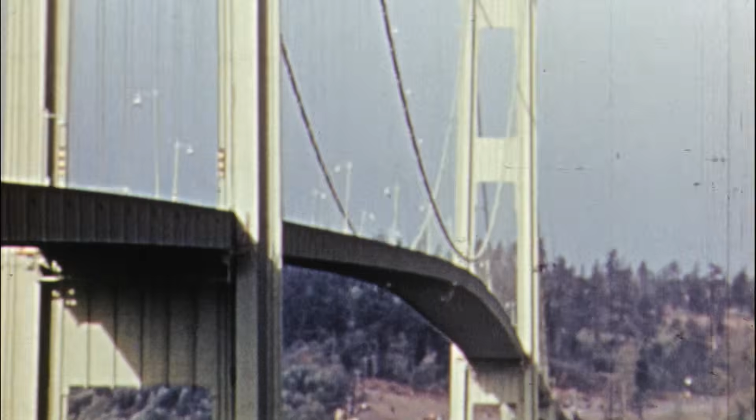In Washington state, a revolutionary bridge becomes an epic disaster. And in the Netherlands, a cutting-edge design comes crashing down. The top floor collapsed first, and then the second and the first. With big builds, even the smallest mistake can be a huge disaster. From miscalculations to misunderstandings. Some with deadly consequences. These catastrophes are every engineer's worst nightmare.

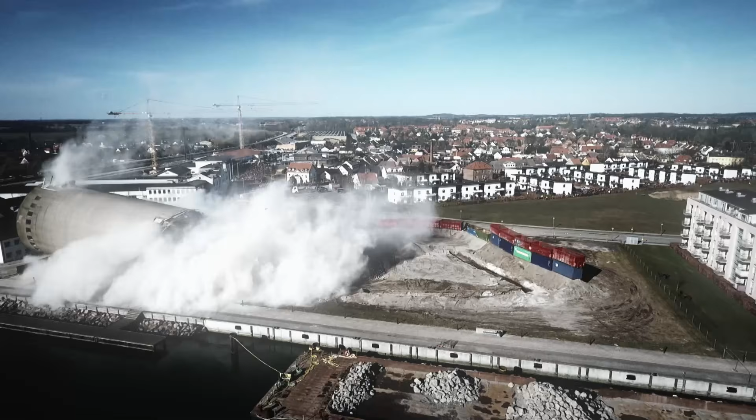Sometimes in big builds, there's a delicate balance between man-made and Mother Nature. Get it wrong, and the results can be catastrophic. Like this disaster that struck a suburban paradise in western Florida. These homes simply disappeared right in front of people's eyes. This is obviously a huge catastrophe, an engineering nightmare.

And left a community wondering, when will this happen again? Before you buy a house in Florida, this is something you definitely need to know about. It was the most devastating thing I think I've ever seen in my life.

Florida, the Sunshine State, boasts the longest coastline in America's lower 48 states. But it's also one of the lowest lying and home to over 30,000 lakes. Hundreds located in the Tampa suburb, aptly named Land O'Lakes. With year-round sunshine, endless lakes, and beautiful waterfront homes, Land O'Lakes is considered to be one of the top places to live in the whole of Florida.

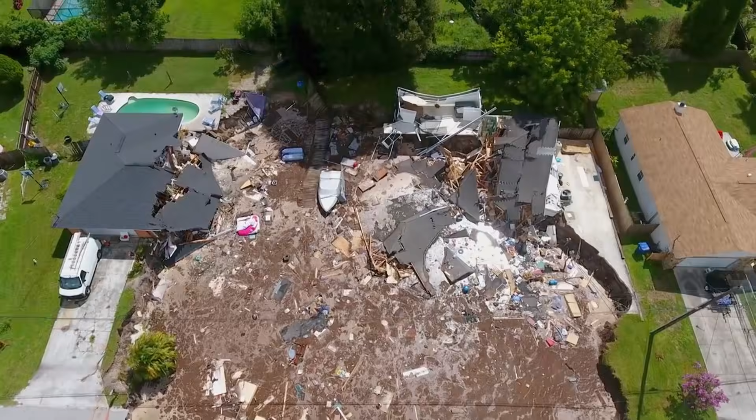This particular sinkhole uncovered a lot of issues for nearby homeowners that they had no idea about. Your quaint retirement life on a nice little lake in the middle of Florida suddenly getting swallowed up by the ground. With 2 homes entirely swallowed up, 6 more condemned, and the width approaching 80 meters, the obvious question was what had caused the massive sinkhole to open up.

One clear suspect was the area's geology. Statistically, Florida has more sinkholes than any other state in the U.S. In fact, the area around the Land O'Lakes is known as Sinkhole Alley. Florida is especially prone to sinkholes because it's largely built on limestone, which dissolves in water slowly, but it always dissolves. And that slow but inevitable process is the reason there are so many lakes here.

Geologist David Wilshaw explains. The limestone here is very porous, lots of caverns in that limestone, and these circular lakes that we see all around us here are reflections of the ground collapsing into the limestone and creating these depressions in the land surface, which then fill with water and create the beautiful lakes we have in Land O'Lakes.

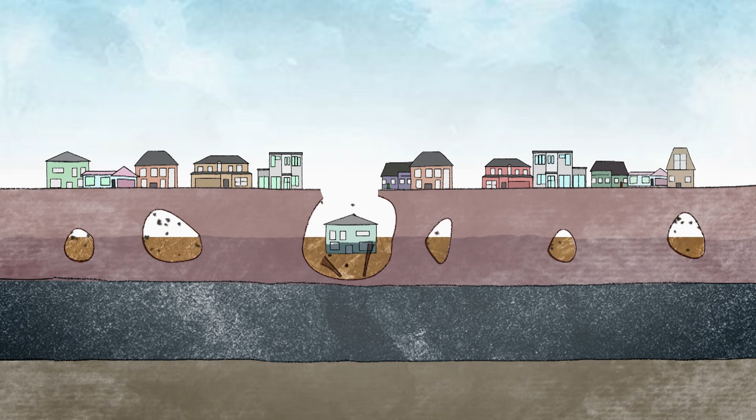While the sinkholes are actually responsible for the lakes that give the area its unique appeal, they also put its residents at serious risk. You could say a sinkhole is like an hourglass, with material being eroded from below. Eventually, as the material slips through the cracks, there's nothing solid holding the building up, and the ground gives way with a sudden and dramatic collapse.

Since 2003, there have been more than 300 reports of sinkhole activity in or around Land O'Lakes. It isn't the Land O'Lakes, it's the land of sinkholes. So, sinkholes are known and expected here.

And yet, despite all the evidence pointing to limestone eroding beneath the surface, geologists found that this sinkhole was the result of human activity. Sinkholes are no surprise to this area, but here it seems that Mother Nature's not wholly to blame. While sinkholes occur naturally in Florida, geologists believe many, like this one, are man-made.

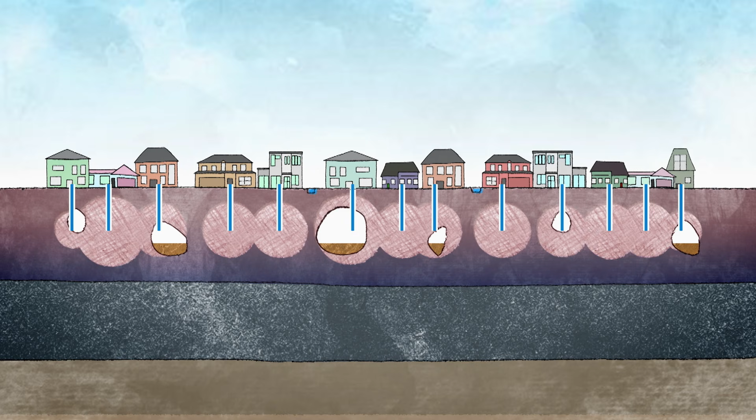By rapidly developing the area, groundwater is extracted and used for irrigation or residential taps, creating a cavity, destabilizing the ground below. Building work above ground can weaken the limestone even further, causing the soil above the cavity to collapse suddenly and without warning. This type of sinkhole is known as a cover collapse.

The developer decided to dredge the canals to interconnect all the lakes to create more potential waterfront home sites. When they dredged those canals, they filled in areas that probably should not have been filled in at that time. And over time, Mother Nature's just decided to take her property back and turn it back into the lake.

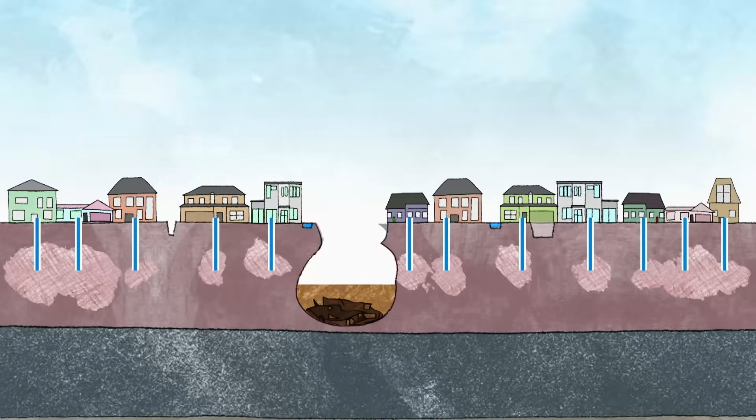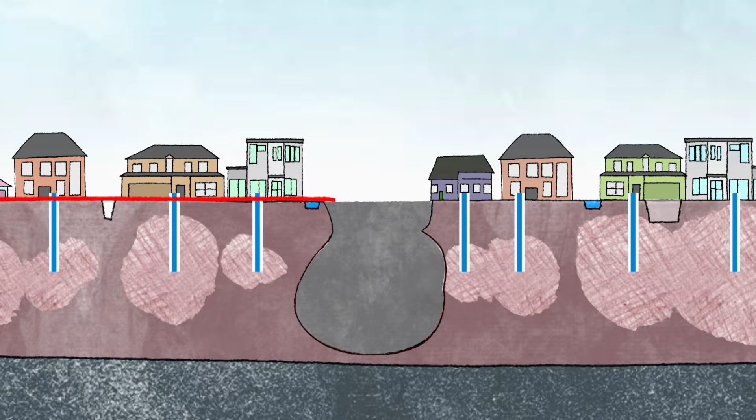The result? Decades later, the giant sinkhole opens up in Ocean Pines Drive. With homes and a road destroyed, engineers looked at ways to fix it. One solution used elsewhere is to simply fill the hole with a concrete plug. But here, with the land already unpredictable, completely filling it with heavy concrete wasn't viable. There's no way this land could be used for development again.

But to try to prevent it eroding further, engineers stabilized the bottom of the hole with tons of rock. For now, the sinkhole isn't going anywhere, but it's a frightening reminder for everyone of the danger lurking beneath their feet. Journalist Evan Donovan covered the story.

It is bad luck, it is nature, but it seems like we have the technology now to figure out where it's most likely that these things would pop up, and then what we can do to sort of mitigate the impact when they do happen. A lot of these homes were built in the 70s and 80s. Today, developers have new tools to check what's underneath, so in theory, this kind of collapse should be a thing of the past. Geologist David Wilshaw thinks they may have found the answer: ground-penetrating radar.

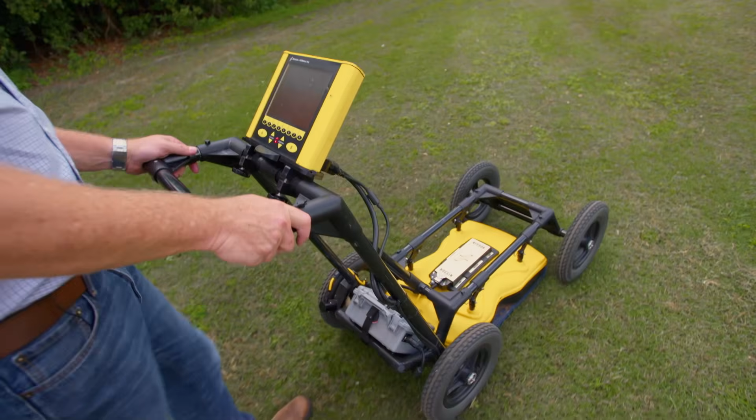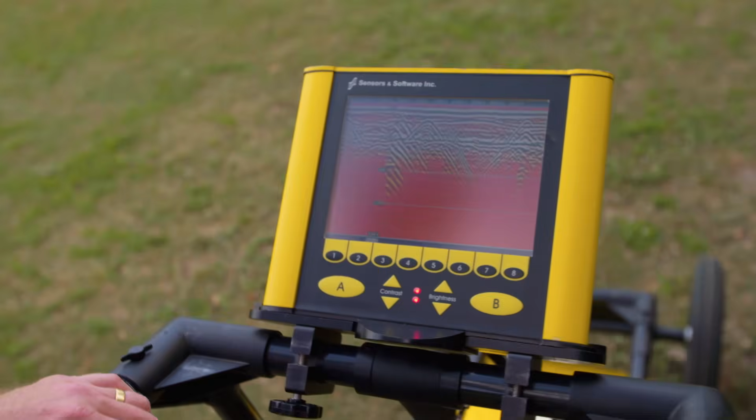And I know it looks like a glorified lawnmower, but it's a $30,000 very sophisticated-looking lawnmower. So, we use it all the time here in Florida to image the ground to try and find sinkholes. It puts electromagnetic energy into the ground, which passes through the different soil types at different speeds. And we can tell where those soil types have been disturbed. For example, if we have a sinkhole that might be forming, you'd expect to see those layers of soil dipping inwards towards a sinkhole.

While this technology can help prevent a future disaster, the demand for groundwater and land resources in Land O'Lakes continues to increase. And when you're building on shaky ground, there's always a risk. But despite the threat of other sinkholes opening up, there will always be a demand for homes with a lake view. Losing your home is heartbreaking, but thankfully this time, no one was hurt or killed.

A heartbreaking tragedy that shook an entire city. The sheer magnitude of this catastrophe turned thousands of tons of concrete and steel into rubble in just seconds. Many were left wondering why this one structure was so completely destroyed. I was looking at hand of God type of stuff here.

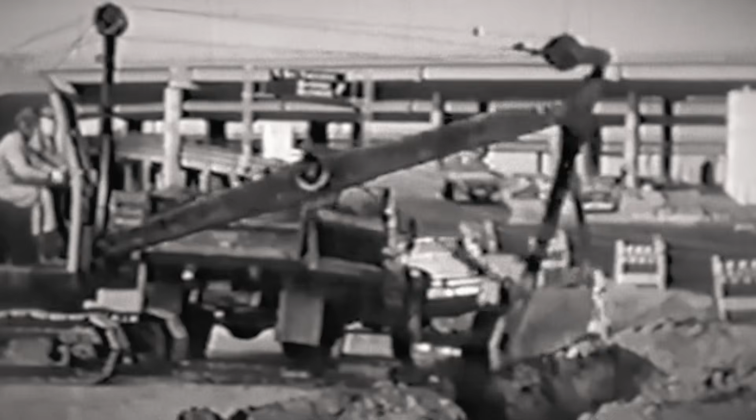200,000 refugees left the city. Many moved east across the bay to Oakland, doubling the city's population. Despite the danger lurking beneath, in the mid-20th century the population boomed. In the 1950s, to ease congestion, construction began on a new section of freeway running through downtown Oakland. To bypass local streets, planners turned to an age-old solution. Instead of going around, they would go over.

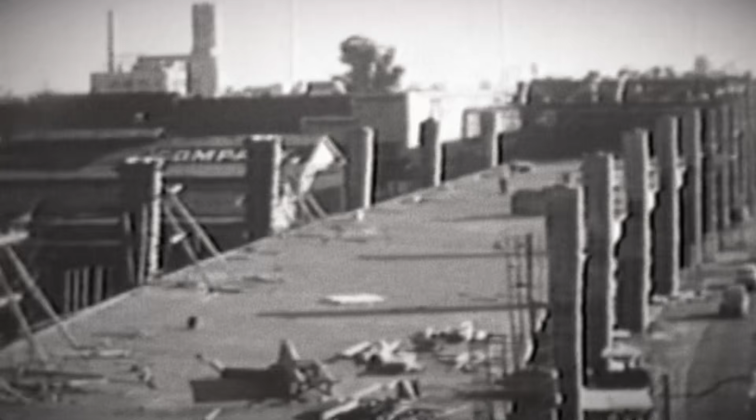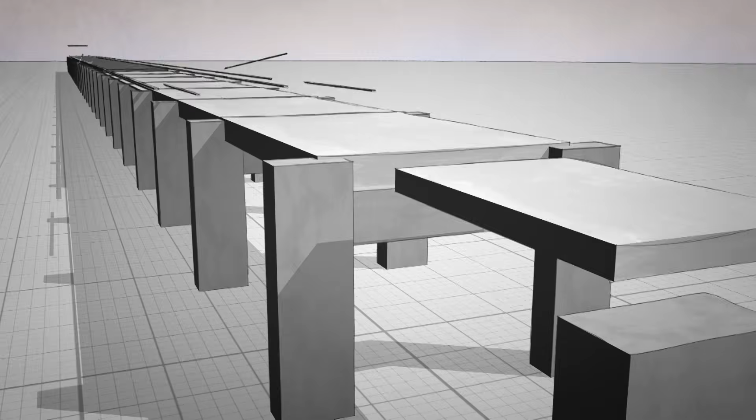Elevated roads have been around since Roman times and are known as viaducts. They're essentially a bridge or a sequence of bridges designed to carry a road over an obstacle, which could be a valley, a marsh, or a busy urban area. But this would be no ordinary viaduct. The plan was to build California's first ever double-decker freeway. Essentially one long line of bridges standing on top of another, running for more than 3 kilometers. The result? The Cypress Street Viaduct.

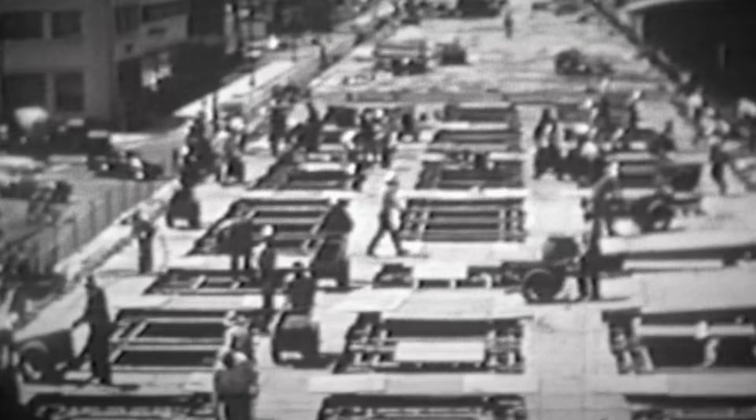In the 1950s, when the Cypress Street Viaduct was built, single-deck roadways were common, but building a double-deck viaduct was a first for California. Like all structures in the Bay Area, earthquake resistance was a key factor in this groundbreaking design. Structural engineer Jack Moehle explains. The Cypress Street Viaduct was one of the very earliest examples in the United States using pre-stressed concrete, a form of construction where the concrete is cast with the steel reinforcement pre-tensioned inside the structure.

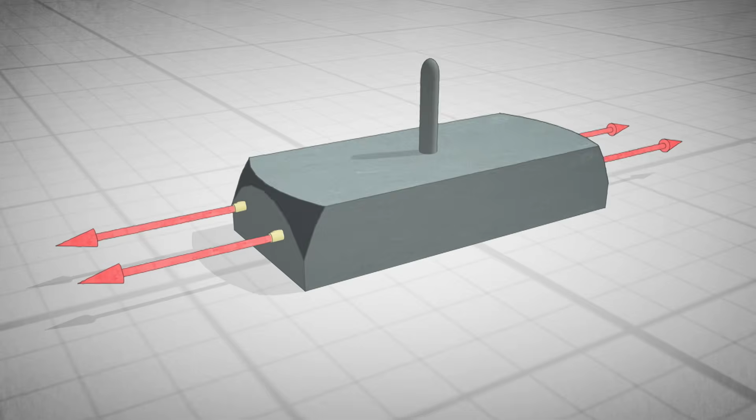A lot of structures use concrete poured over steel bars or rebar to give it strength. Engineers can make the concrete even stronger by stretching the bars tight before the concrete is poured. When it hardens, the steel is released, essentially compressing and strengthening the concrete. That's known as pre-stressed concrete. It's widely used today, but back then, it was untested. That was a very new, young technology. In fact, it was perhaps the first bridge in the United States that was built and designed with that technology.

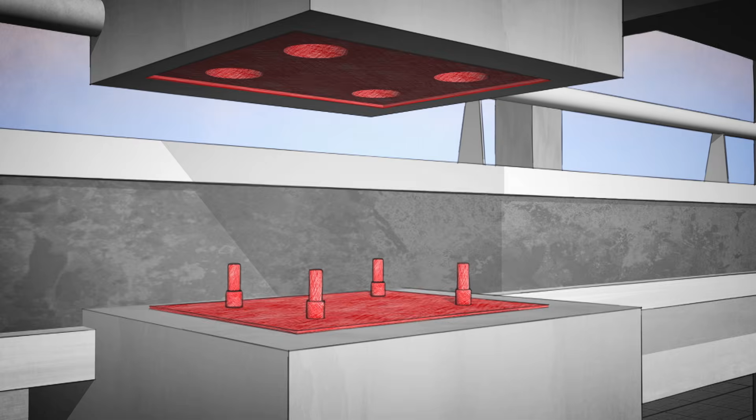They were concerned that if the structure moved, it would develop internal forces that would cause cracking and decrease its service life. And so what was done was to build a structure that was very loosely tied together so it could move. A fundamental element of this ability to move is steel rods embedded in the concrete where the columns meet, known as shear keys. Shear keys are designed to allow a building to shake during an earthquake without moving too far. At least that's the idea. In the viaduct, these were metal rods between the upper and lower columns designed to stop the top being shaken off. Here, to absorb earthquake forces, they would allow some movement, but not so much that the top columns could slide off the bottom.

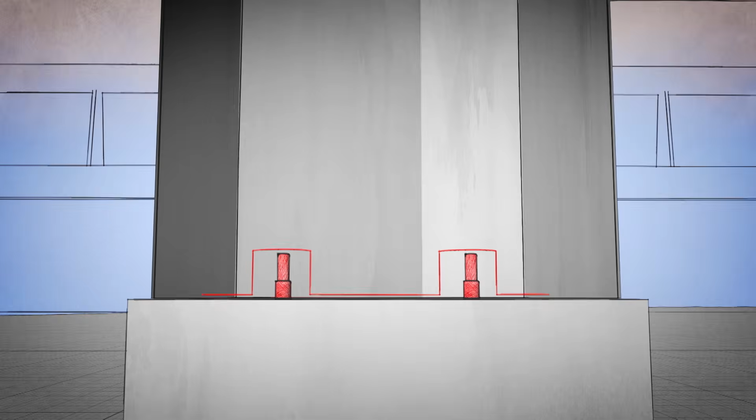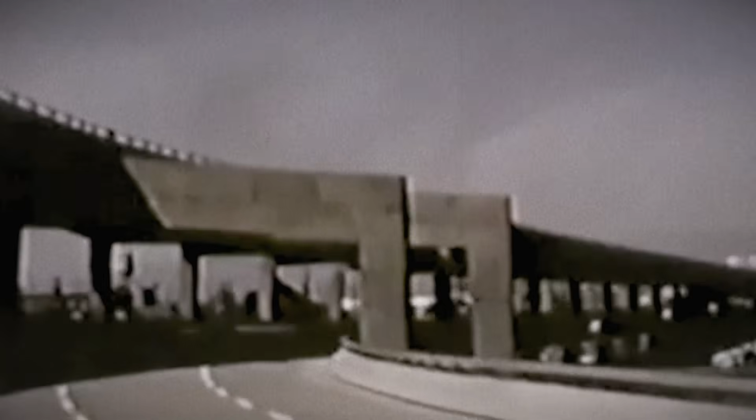The Cypress Street Viaduct opened in June 1957 at a cost of $9 million and was a huge success. It carried tens of thousands of vehicles a day for the next 3 decades. On Tuesday, October the 17th, 1989, Game 3 of the World Series between the Oakland A's and the San Francisco Giants saw more than 60,000 fans fill Candlestick Park. Anthony Moore, then a cub reporter, covered the game. So I went down to Candlestick Park in San Francisco to cover fans outside the stadium who didn't have tickets but still tailgated the game.

We had barely gotten equipment out. The camera was just on the shoulder of the photographer when, boom.

Oh my God, we're having an earthquake. Wait a minute. Hold on. 911. Yeah, this is an emergency in San Francisco. What happened? There's a hell of an earthquake, and we've got...

Just after 5 p.m., 60 million baseball fans saw their TV screens go black.

And we've got windows and everything.

The largest earthquake in 80 years ripped through the Bay Area, registering 7.1 on the Richter scale. The epicenter was over 60 miles or about 100 kilometers away, and the quake only lasted for 15 seconds, but it sent shockwaves that would leave a tragic mark on the city. A 1.2-kilometer stretch of the double-deck Cypress Street Viaduct had collapsed. I instantly knew this was the biggest disaster I'd ever seen. It was shocking. It was almost impossible to communicate visually or in words the scale of this devastation.

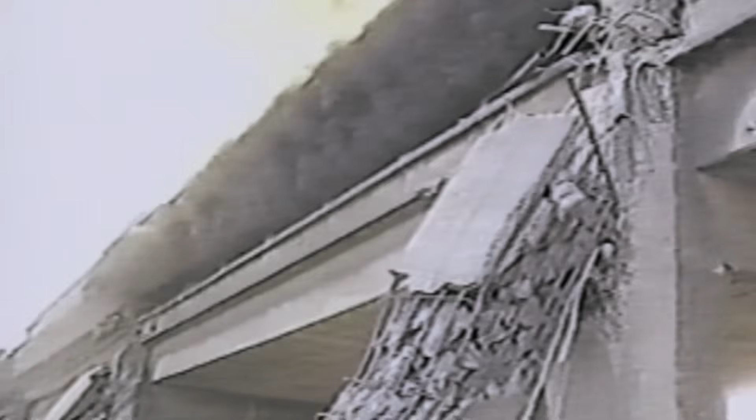Mark Hoffman, then a lieutenant with the Oakland Fire Department, was on duty nearby when he realized a major disaster was unfolding. We're only 2 blocks away from 14th and Broadway. That's basically the heart of downtown. When we pulled up here on 14th, I looked to the right. I saw a giant plume of smoke. Told the driver we're making a right. From here on out to about a mile and a half, the freeway was either partially or completely collapsed.

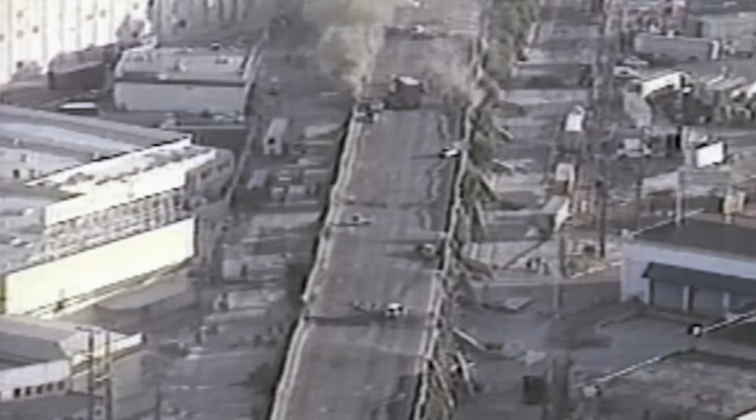About 25 feet up was the first deck, and then the upper deck had collapsed, pancaked onto the first deck. We were roughly located where it was intact all the way to right about there, and then was collapsed from then on, as far as the eye could see.

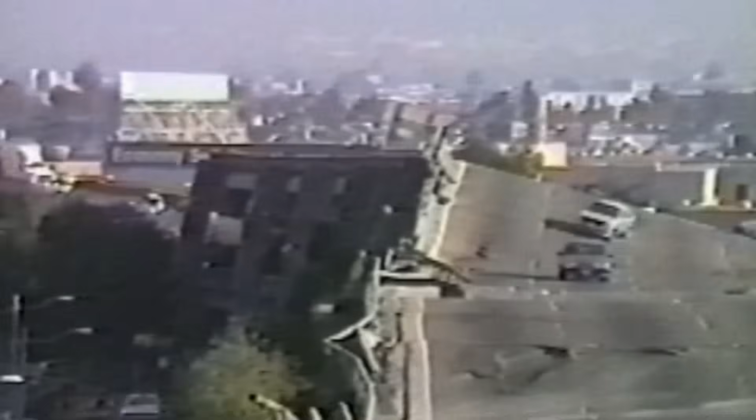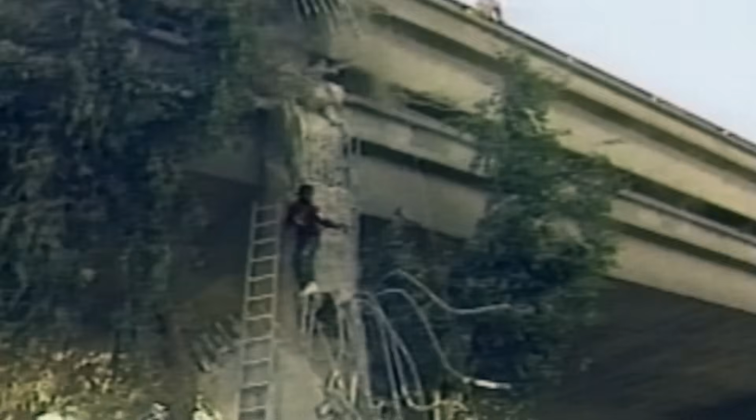107 vehicles were on the Cypress Street Viaduct as it collapsed. Rescue crews and local residents worked to free people trapped in the rubble. We had an elevated ladder that we were able to throw, got us up onto the lower deck, but on top of the collapse, and we went to work.

The rescue mission ran through the night, but despite the city's best efforts, 42 people lost their lives. In the coming days, questions were asked. When so many structures escaped serious damage, why was Oakland's Cypress Street Viaduct so catastrophically destroyed?

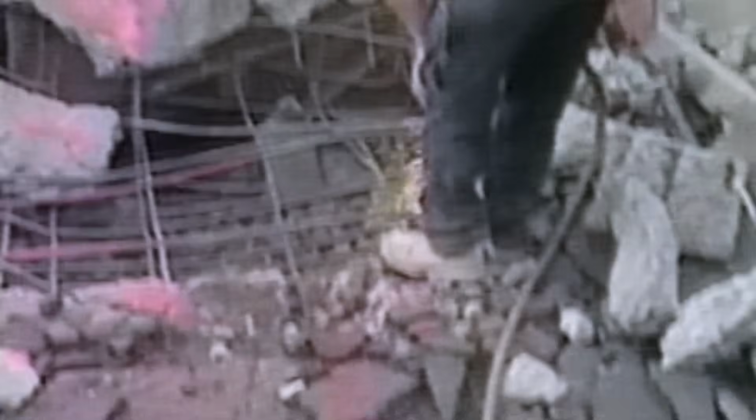After the collapse, investigations suggested that the pioneering use of pre-stressed concrete during construction 3 decades earlier had played a key role. Engineer Jack Moehle explains. We didn't at that time understand very well how big the earthquake forces could be in a structure of this type. So the amount of steel that was built into it was very little.

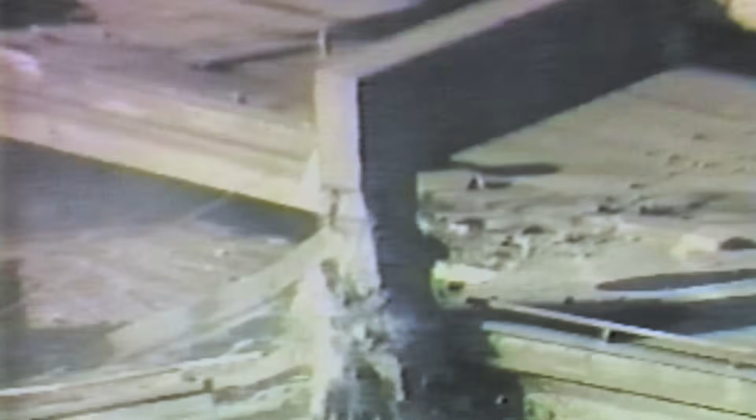So when the earthquake came along, the loose structure moved a lot. Those parts of the concrete that were inadequately protected by steel, they crumbled. As they crumbled, they lost the ability to support the weight of the structure. It started to come down, and as it moved downward, it broke other pieces of the structure, and the collapse propagated along the length.

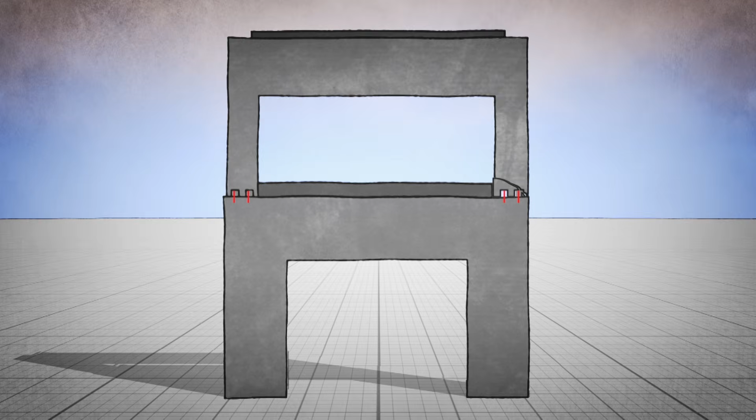As the viaduct shook during the earthquake, the shear keys connecting the columns began to vibrate, cracking the concrete surrounding them. Without proper support, they broke sideways through the columns. The structure collapsed. So, the pre-stressed concrete surrounding the shear keys simply wasn't strong enough, and this wasn't catastrophic for just one section of the viaduct.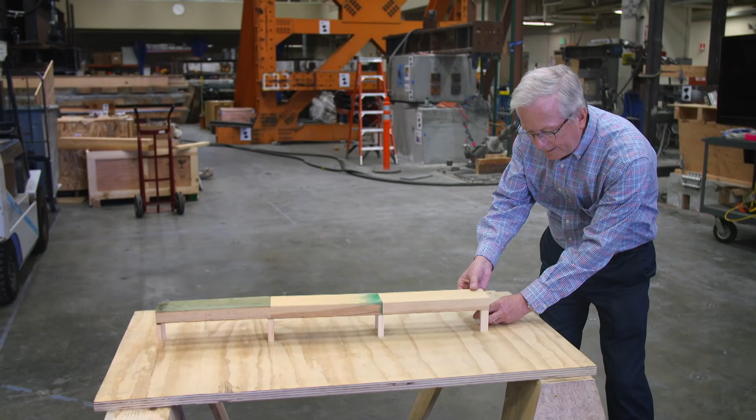With a structure of this type, if during an earthquake, one of the elements should fail, in this case, one of the columns supporting the bridge deck, there's the potential that it loses its support, and as it begins to fall, it starts taking down the entire rest of the structure.

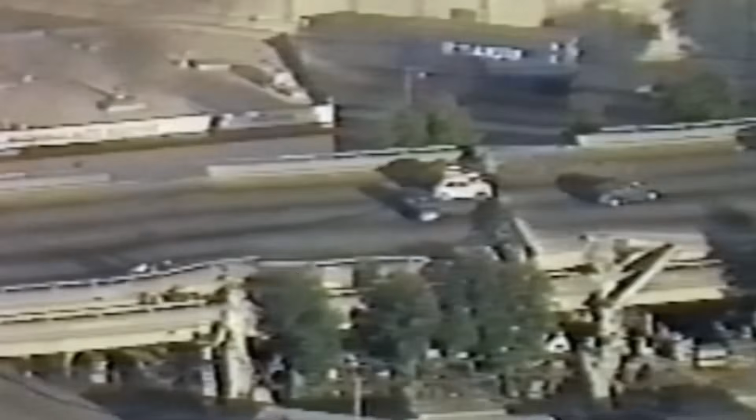In the case of the Cypress Street Viaduct, some very vulnerable pieces of the bridge failed first, and then as the structure began to fall, it, like a set of dominoes, took down the rest of the structure along the length. Engineers may have overestimated the strength of the concrete, but that alone didn't explain the carnage. The disaster was made so much worse by the local geology.

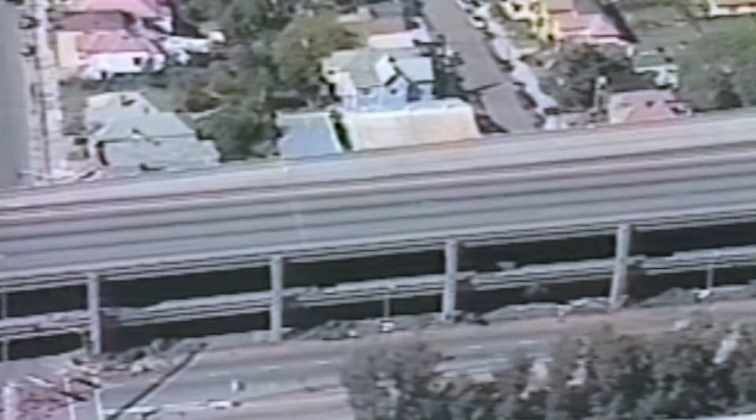Earthquake engineer Jonathan Bray explains. So the Cypress structure itself is actually founded on dense sands and stiff materials, but then it goes out across an old mudflat that has been covered with some artificial fill. And that mud in that location is anywhere from 3 to 7 meters thick. It's soft, it's weak, and that's the part of the Cypress structure foundation that shook the most violently during the earthquake.

The solid rock helped to dampen out the vibrations, but by contrast, this soft bay mud helped to amplify the vibrations by as much as 5 times. This quirk of geology made things much worse. The effect of these huge amplification forces hadn't been factored into the original design.

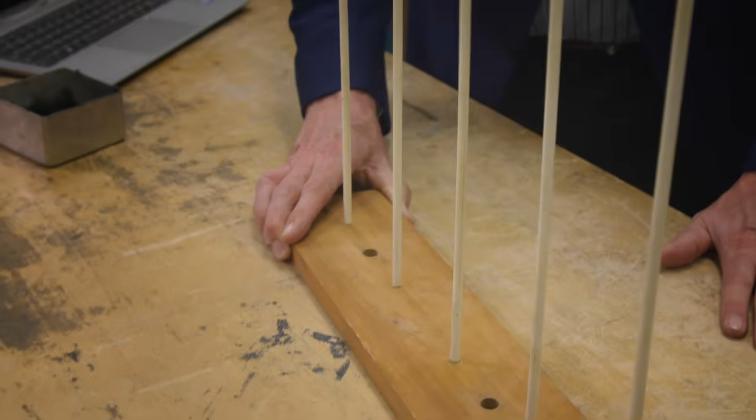When the ground comes and shakes a building, you can see that this shaking level, this period of the shaking, really causes this one to accelerate while the other ones barely move. If I shake it a little bit slower, you can see that there's very little shaking of the lower masses, but that longer mass, which is softer, tends to get amplified the greatest.

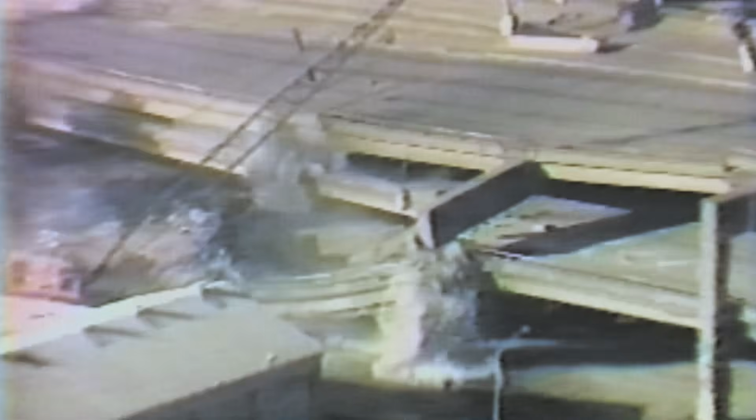When you build a structure on top of a soil deposit that amplifies shaking, you have an amplification of the forces that are placed on that structure, and therefore it causes more damage. This combination of structural weakness and the soft geology proved to be fatal.

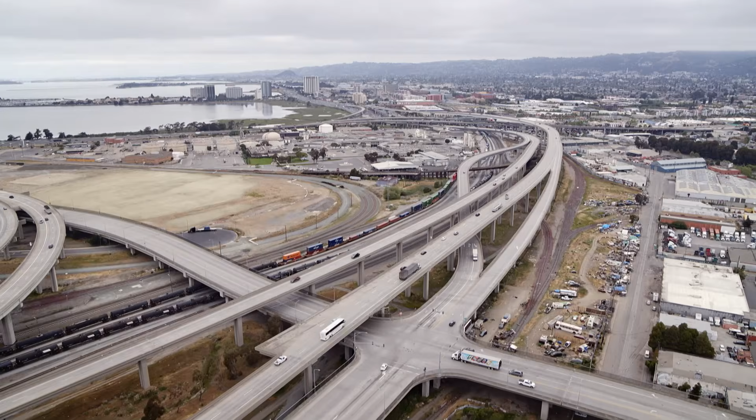After the disaster, the Cypress Street Viaduct was demolished and the freeway was relocated to the west along the old Southern Pacific Railroad corridor. Lessons were learned, and instead of a double-deck viaduct, engineers built a single-level bypass. The failure of the Cypress Viaduct was one of those failures that taught us what we needed to do differently in bridge design.

One key lesson learned from the collapse was the need for a significant increase in the amount of steel used to reinforce concrete. Typically, when we build reinforced concrete construction today, we've got very heavy amounts of confining steel that hold the concrete together, so that when an earthquake overwhelms the structure, if there's local crushing of the concrete, the reinforcement inside will hold it together and prevent a repeat of the Cypress Street Viaduct collapse.

These new breakthroughs in engineering and technology will hopefully make all structures safer in an earthquake, in the hope that something like Cypress Street can never happen again.

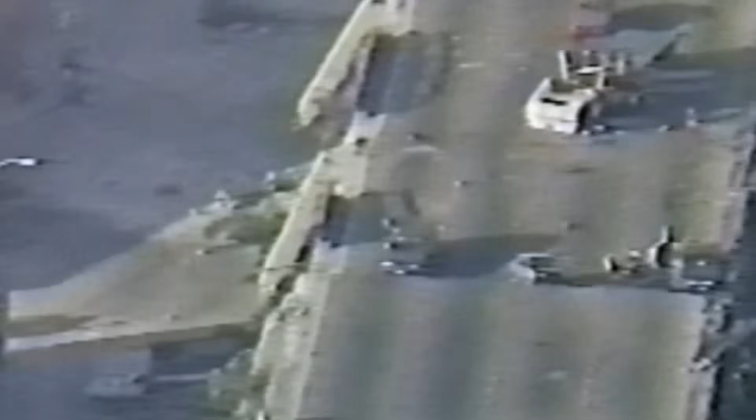Cypress Street was renamed Mandela Parkway, and the Cypress Freeway Memorial at its heart is a poignant reminder for future generations of this tragedy. In terms of total loss of life, in terms of damage to the infrastructure of the community, how long it took to rebound, what it just showed everyone in terms of potential, this, I think, was worst case.

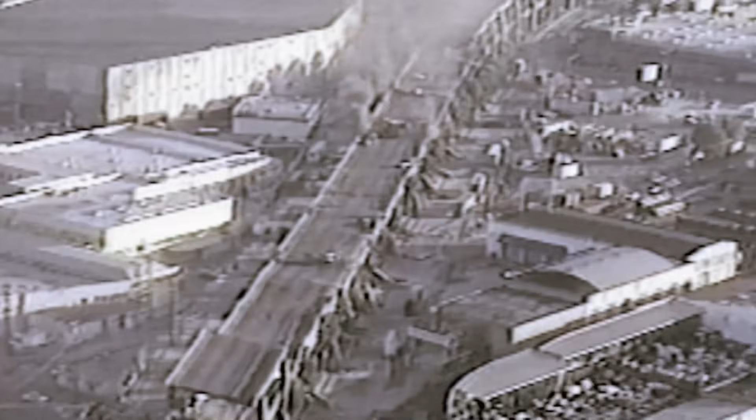With big structures, engineers aim high and push the boundaries with ambitious designs. But push too far and it can be a recipe for disaster. Washington State has been victim to this mistake in a very big way. This has to be one of the most famous bridge collapses of all time. This catastrophic failure earned its place in the Engineering Hall of Fame for all the wrong reasons. We were seeing great chunks of concrete fall off the bridge. With so much carnage, it seems incredible that no one was killed.

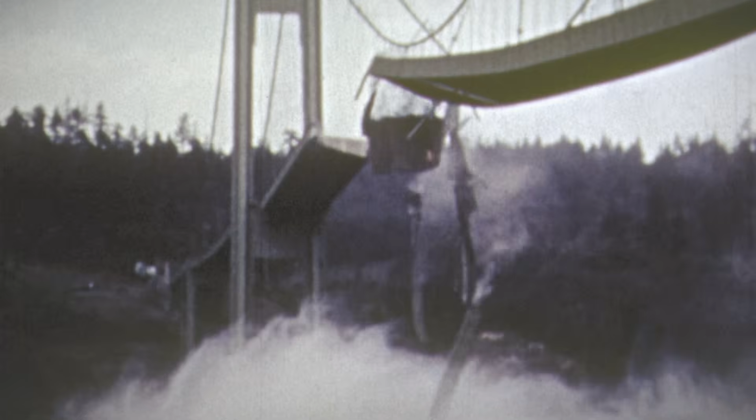Washington State is a wild landscape shaped by powerful forces. The Pacific Northwest has a very rugged feel from the mountains to the jagged coast. With waterways threading through the land, it's long been a haven for bridge engineers. More than half a century ago, one crossing over the Tacoma Narrows revolutionized life for residents. Dale Wersing has lived here since the 1930s. Before the first Narrows Bridge was built, the only reasonable way from Tacoma to Gig Harbor was to take a ferry. Your alternative was a long drive, so people in Tacoma were very excited about this improvement in their lives.

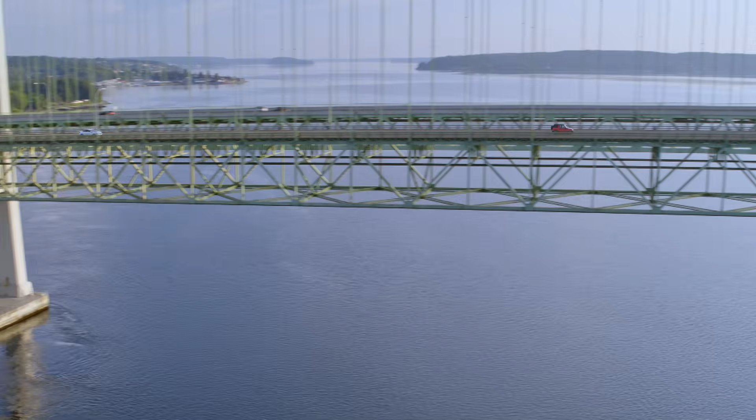With their deep, steep sides, the 1.5-kilometer wide Narrows have long been a challenge for bridge engineers. These twin suspension bridges have stood here since 1950 and 2007. But their now infamous predecessor lasted barely 4 months after opening. The original Tacoma Narrows Bridge took almost 2 years to build. Its giant towers loomed 135 meters over the Narrows, while 600 kilometers of cables held the road deck in place. When the Tacoma Narrows was built, it was the third longest suspension bridge in the world. Only the George Washington and Golden Gate bridges were longer.

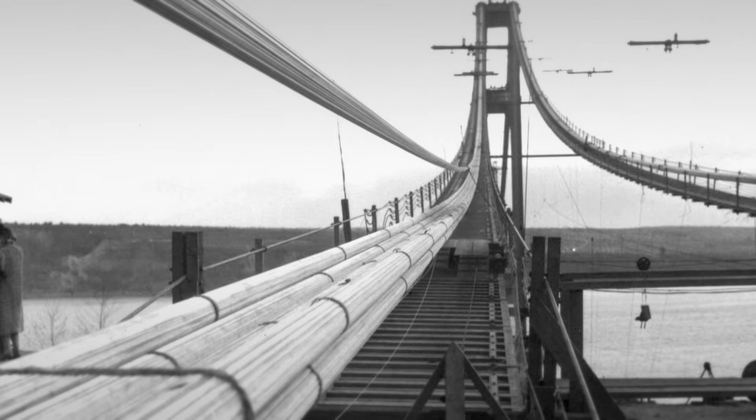The Tacoma Narrows Bridge might not have been the world's longest, but in engineering and design, it was way ahead of its time. Engineer Stephen Ressler explains. Early in the 20th century, suspension bridge design underwent a kind of a revolution as a result of a radical new mathematical theory of suspension bridge analysis. Long-span bridges could be designed such that they were much more slender, much more elegant. That streamlined, elegant effect was achieved by drastically reducing the side profile of the bridge.

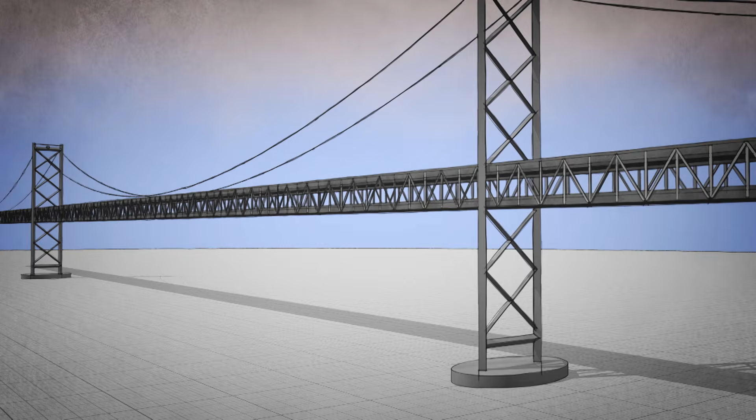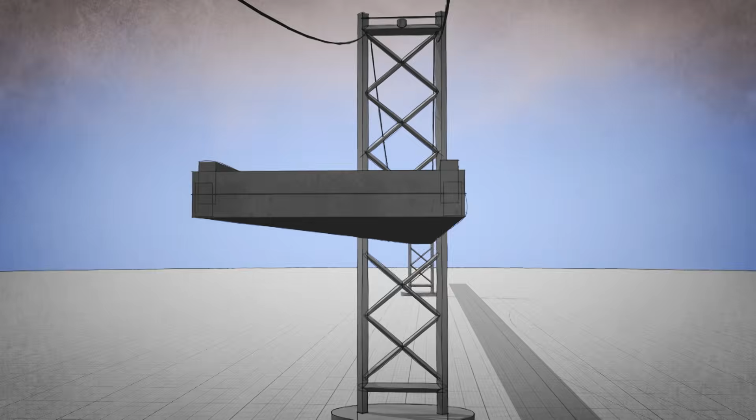Most suspension bridges back then supported the road deck with lattice beam trusses, which let the wind flow through. Here, to slimline the bridge, they used narrower, solid girders. Using solid girders instead of a lattice structure allowed engineers to reduce the depth of the girders from around 9 meters to just over 2. Instead of through, the wind would pass over and under, and yet, crucially, the bridge would be just as structurally sound. At least that was the theory. The lead engineer claimed the Tacoma Narrows crossing was the most beautiful bridge in the world. The bridge engineers achieved their dream of a slim, elegant structure, but there were signs of trouble.

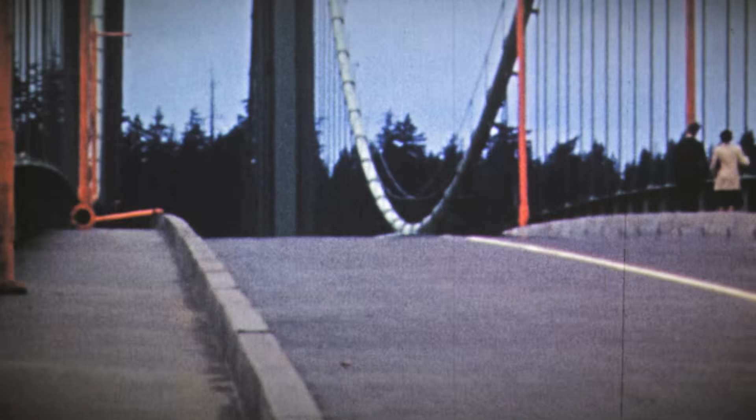Even before the bridge opened to traffic, it was known to rock, even in gentle winds, earning it the nickname Galloping Gertie. The bridge wasn't just swaying, it was twisting and bouncing. Engineers tried various fixes from extra cables to dampers, but nothing would stop the swaying. It seems hard to believe, but although the bridge did clearly move, it was deemed safe for use and opened on July the 1st, 1940. Dale was just 4 years old at the time. One of my memories from my childhood is going for a walk on the newly built bridge, and I have a recollection of the bridge kind of undulating, moving in waves.

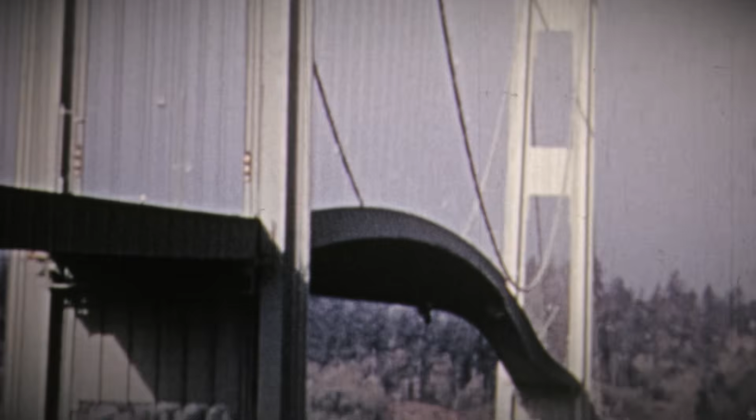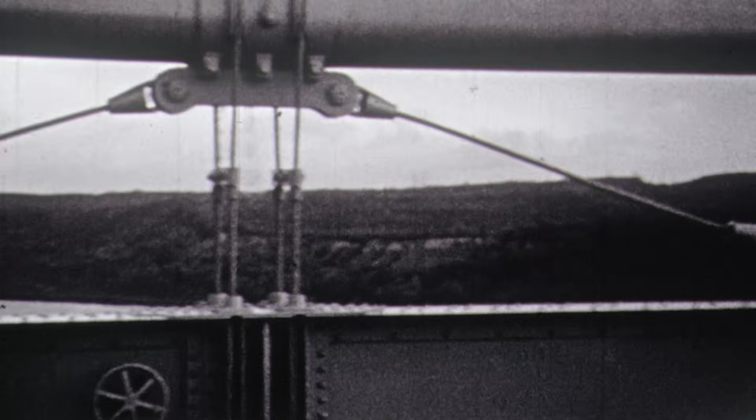On November the 7th, just 4 months after opening, the wind seemed to be making Gertie gallop more than ever. There were 3 people on the bridge when the buckling started. The bridge was twisting and jumping so violently it was impossible to stand up, so they had to crawl to safety. The movement of the bridge quickly worsened, to the point at which the cables could no longer handle the load. Just over an hour after the rocking started, the central span dramatically collapsed, leaving little more than the main towers standing. As I watched Galloping Gertie fall, we were seeing great chunks of concrete fall off the bridge and splash into the Narrows.

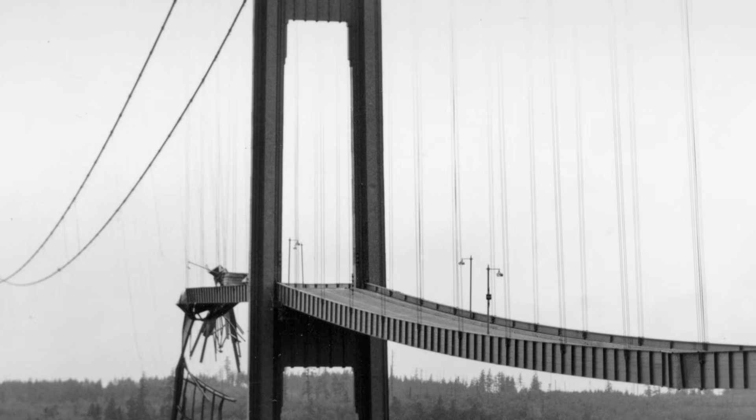Thankfully, everyone made it off the bridge before the deck failed. The only victim was a dog named Tubby, who was trapped in a car. In the aftermath, an investigation was launched to determine exactly what had gone wrong.

To prevent a repeat, engineers needed to know why Galloping Gertie had collapsed so dramatically. This included wind tunnel tests, which revealed that the failure was connected to the cutting-edge slimline design. The heart of the problem was the solid supporting girders. They were interacting in an unexpected way with the wind passing over the bridge.

Engineer Stephen Ressler explains. What happened with the Tacoma Narrows Bridge, and is a common phenomenon on long, flexible suspension bridges, is that the wind blowing across the bridge causes aerodynamic effects, which result in periodic vibrations of the bridge. If I disturb this structure, it will vibrate at a certain frequency, that is, a number of cycles per second.

The aerodynamic phenomenon that occurred on the Tacoma Narrows Bridge was that the distortion of the bridge under the action of the wind blowing across it caused the disturbance. That disturbance generated turbulence in the wake of the wind flowing across the bridge, and that turbulence reinforced the deformations, such that with each cycle, the aerodynamic effect of the wind blowing across the structure reinforced the size of the individual vibrations. So the vibrations simply got larger and larger and larger.

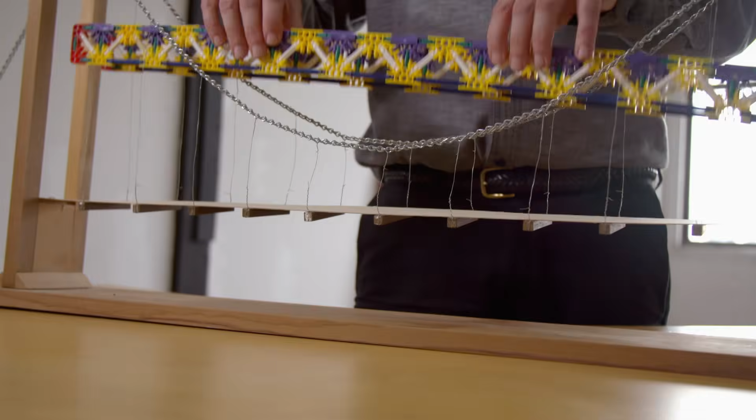Learning from the collapse, engineers designed a new bridge. This time, they were taking no chances. The solution was really just to revert back to the technological form that was prevalent prior to the design of this structure. And that was simply the use of robust stiffening trusses to stiffen the deck of the bridge. And so just as that stiffening truss was the solution to the problem of handling heavy concentrated loads, it also proved to be an entirely effective solution to the problem of wind-induced vibrations.

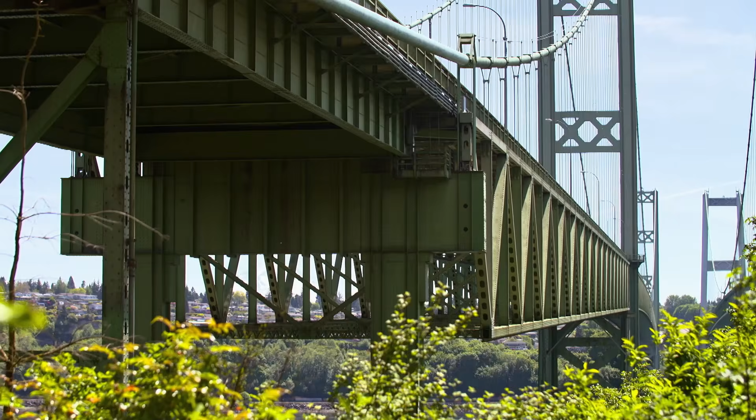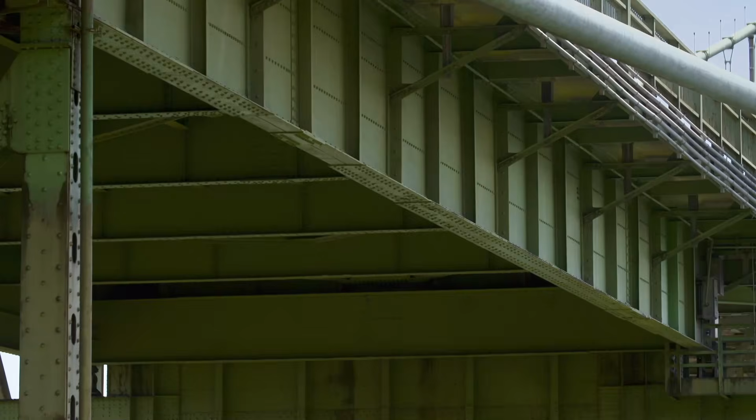Engineers were able to repurpose the approach span from the original slimline structure, with the difference in depth between the old and new technology blindingly obvious. Project manager Tim Moore explains. What you're seeing here are 3 of the original Galloping Gertie 1940 bridge spans. These spans were not damaged in the 1940 collapse. What's unique is when we get to the side span, you can see the 33-foot deep stiffening truss. It's torsionally significantly stiffer than the plate girder system of the 1940 Galloping Gertie bridge.

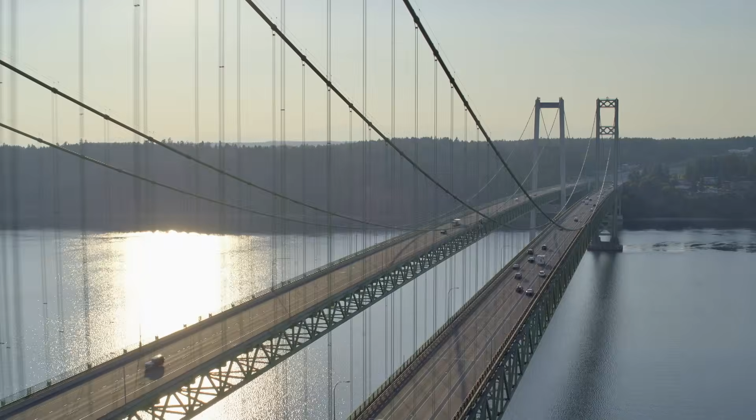Over time, traffic using the crossing became so high that in 2007, a twin suspension bridge was opened, running next to Sturdy Gertie. This disaster highlighted the risks of pushing the boundaries with massive structures and has influenced bridge designers ever since.

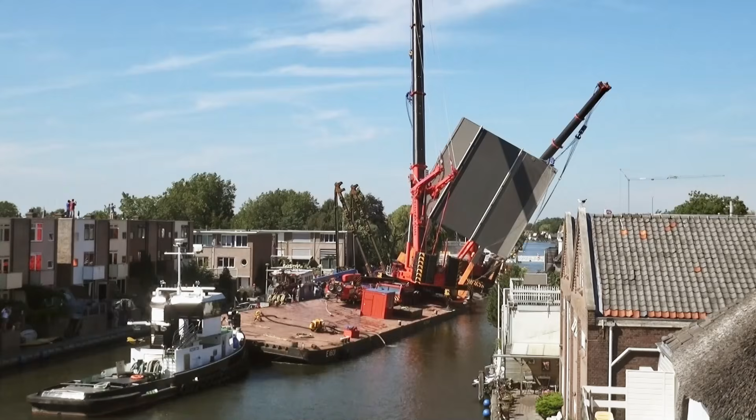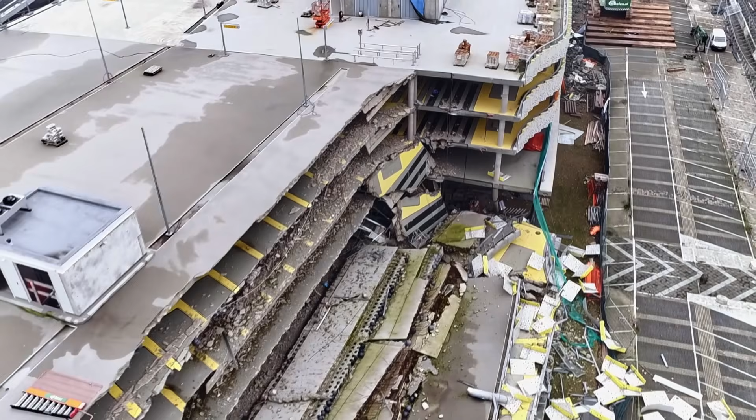Sometimes in engineering, even the best laid plans can go disastrously wrong, and the smallest mistake can lead to catastrophe. Like this pioneering structure in the Netherlands, which failed spectacularly. The top floor collapsed first, and then goes the third floor, and then the second and the first. A building reduced to rubble in seconds. The mistakes hidden within every level of this build triggered a nationwide panic.

The Dutch have a long history of exploration, and it feeds into all walks of life, including their architecture and engineering. Local journalist Yuwar Abbas explains. Dutch engineers, they like to build fancy structures, not only for living, let's say, to use it, but also to make it look nice.

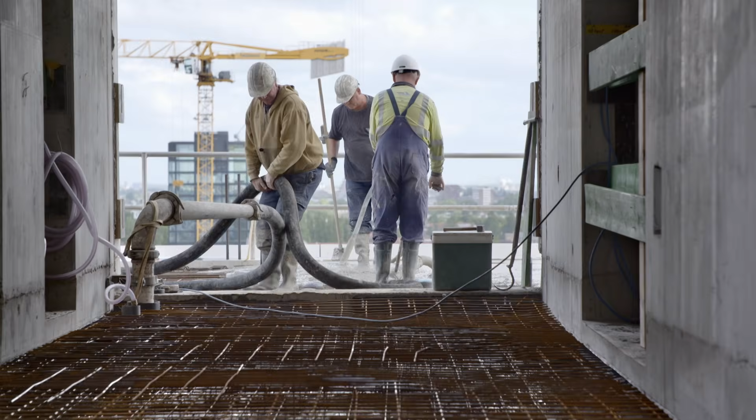This is the Hourglass building in Amsterdam's Zuidas business district. This building is a great example of Dutch innovation. When it's complete, it will house offices and a hotel, all in a cutting-edge geometric design. But this development isn't only about the aesthetic. It's being constructed using a pioneering new technique. Instead of using standard concrete for each floor of the building, engineers have opted for biaxial voided slabs.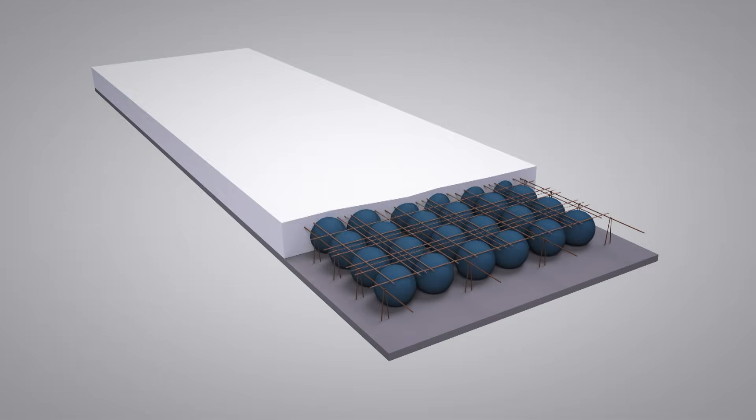Biaxial voided slabs sound very technical and complex. However, the principle of this technique is relatively simple, not to mention ingenious. When constructing a new floor slab, plastic spheres filled with air are placed into a steel framework. Then concrete is poured into that framework.

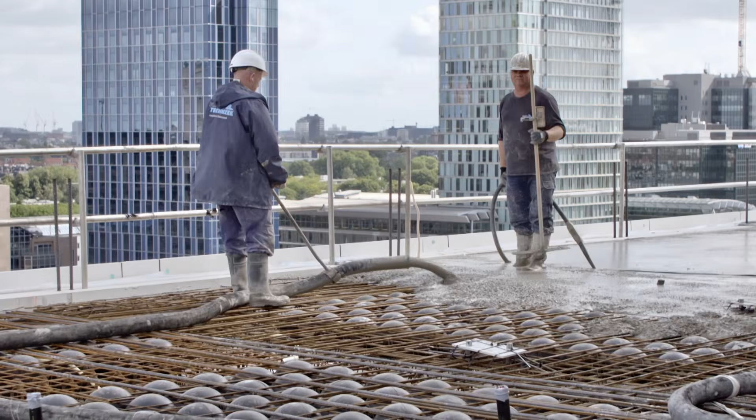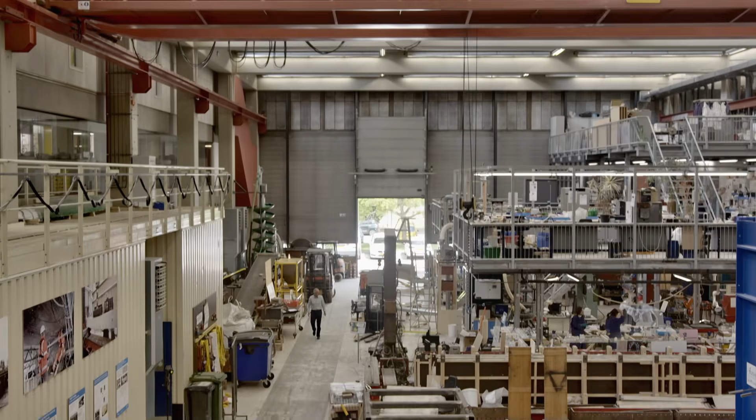The result is a slab that uses 1/3 less concrete than a solid slab. Less concrete means that the floor slab is significantly lighter and cheaper, but it is just as strong as a solid concrete slab. Structural engineer Professor Rob Nijsse is familiar with the technique.

It's a very good practical thing, because you have to reduce the weight of the floor. All this stupid concrete, which is enormously in weight, 2.5 times as much as water. So it's all pressing down all the time long. So if you can make that into air, you save enormously weight of the structure. So it's a very clever system.

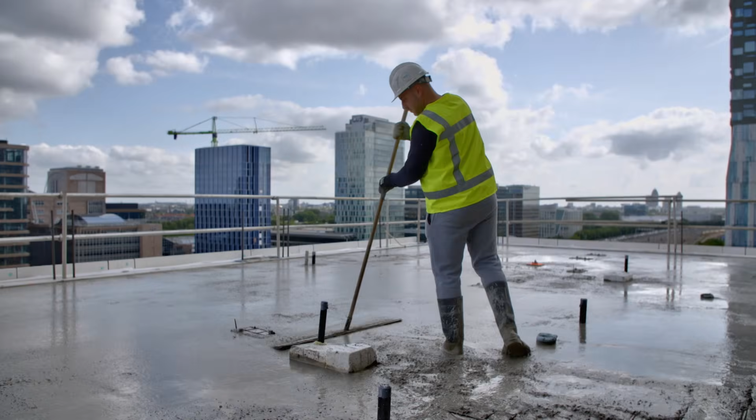With this technique, architects can create bigger spans in buildings requiring uninterrupted space. It's an ideal method for buildings with open plan spaces, like an indoor stadium or a car park. In 2016, architects working on Eindhoven Airport were planning to use air-filled concrete in a new, state-of-the-art car park.

This is the second largest airport of the Netherlands. This demands extra space for the parking. So the parking garage here is located perfectly near the Eindhoven airport. And for technology like bubble deck, this is the perfect application because you have wider floors and you want to use your space efficiently. Moreover, this gives you an advantage of sustainability.

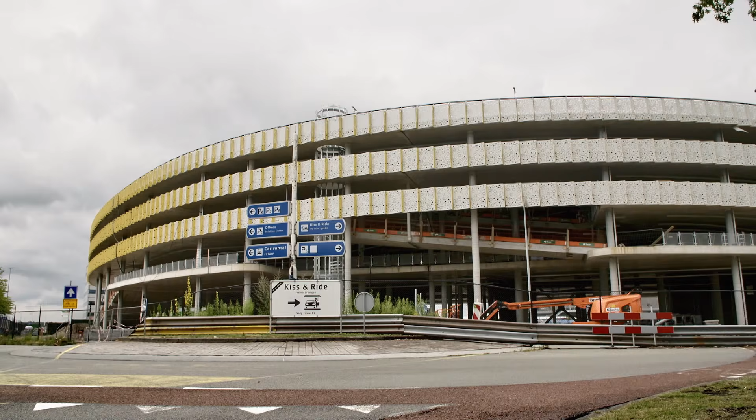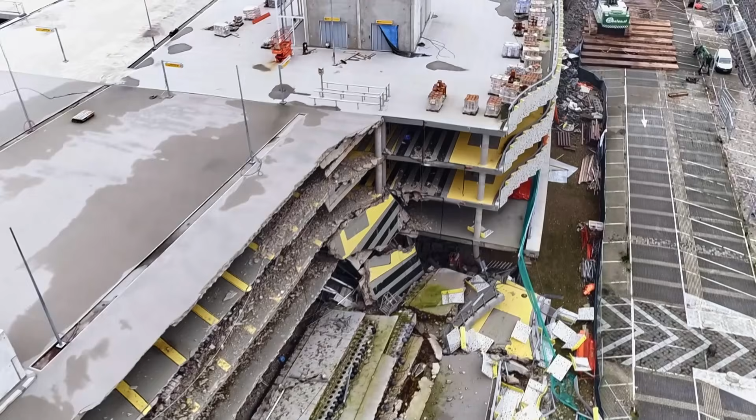In late May 2017, with the building nearing completion, disaster struck. A large section of the car park collapsed. On the day of the incident, it was a complete chaos here. 4 floors of this building behind me collapsed. The top floor collapsed first, and then the 3rd floor, and then the 2nd and the 1st.

And people were shocked. The biggest fear of the people was, are there any casualties? Luckily, no one was hurt. But just hours before, dozens of workers had been on site. An investigation was launched to discover what was behind this catastrophic failure. All eyes focused on the biaxial voided slabs.

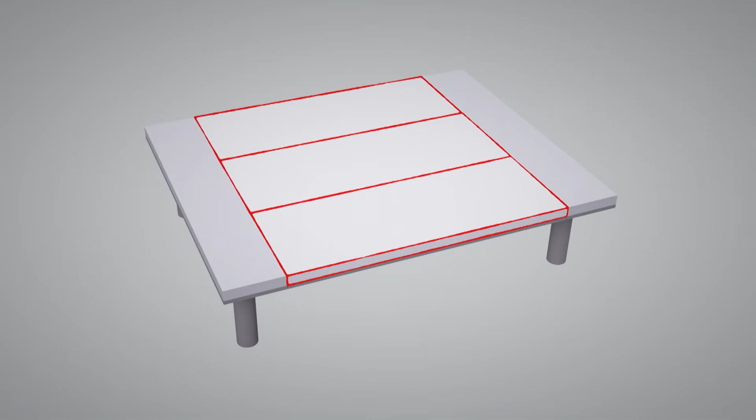The section of floor that had caused the collapse was constructed of the bubble-filled concrete. But it wasn't the slabs themselves that were to blame. It was how they were laid. Engineers were positioning the slabs to span a large space between 2 main structural columns. But instead of following the plans that had each end of the slabs placed on the supporting columns, they rotated them through 90 degrees. So some slabs had no actual support from beneath.

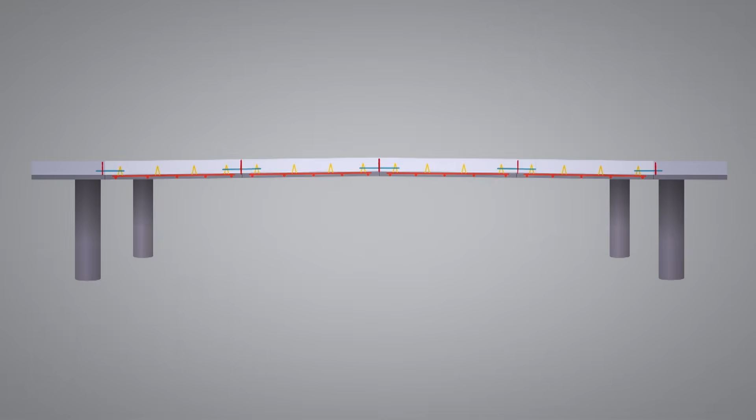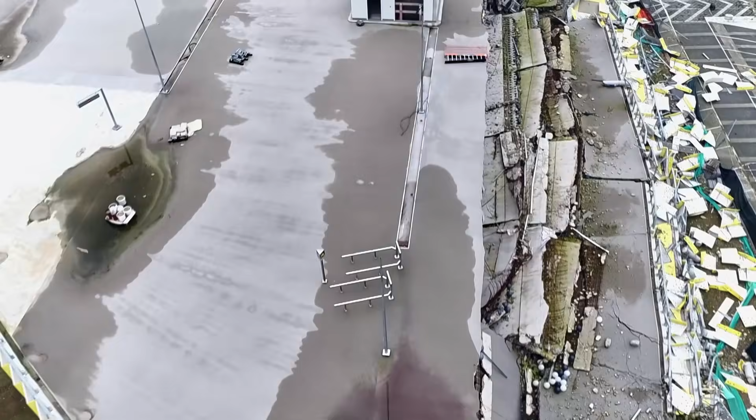This created a weak, unsupported point in the middle. The investigation concluded that the decision to rotate the bubble-filled concrete slabs by just a quarter turn was the crucial mistake.

Normally, these plates are made in long plates, and they are spanning from wall to wall. In this case, they decided to use it the other way, to make plates like this and in between like this. This can work, but it means that where the joints are, there has to be extra reinforcement. They forgot it. This is such a simple failure. If the plans had been followed correctly, the floor would have been fine.

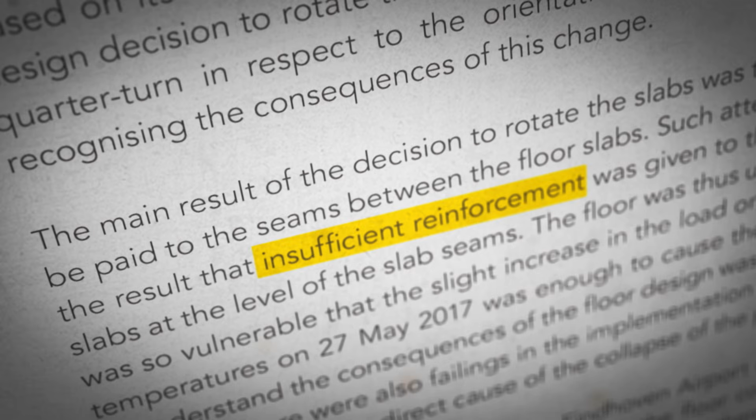The report found that without reinforcement, the floor was so vulnerable that even the slightest increase in load was enough to cause it to buckle. When this car park behind me collapsed, this was big news in the Netherlands because most of these government buildings and schools in the Netherlands use the same building techniques as was used in this car park.

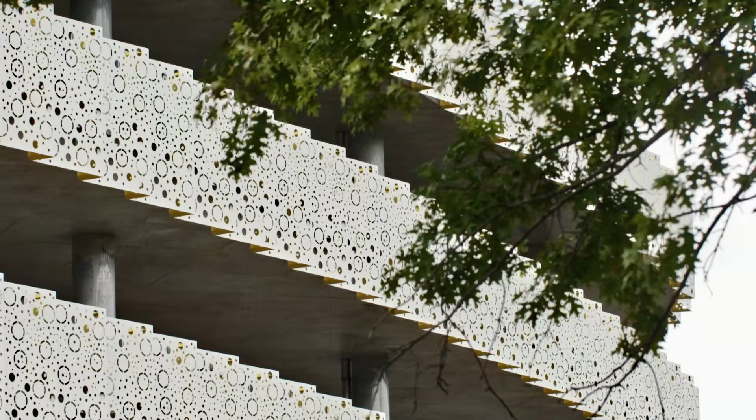They pinpointed 150 buildings which required thorough investigation. To prevent another catastrophe, the Dutch Safety Board inspected the buildings in question to ensure that the bubble-filled concrete had been installed correctly. Until the investigation was finished in these 150 buildings, the people and employees in those buildings were instructed to be careful. For example, they were not allowed to gather in numbers. They were not allowed to dance.

It sounds ridiculous to ban dancing and office gatherings, but this reveals how worried people and organisations were about the structural integrity of these buildings. All the buildings investigated received the all clear, and the restrictions imposed on employees were lifted.

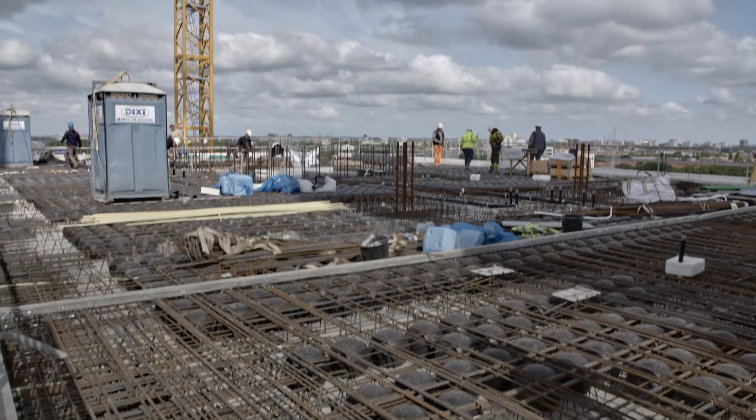I've no idea how much dancing typically goes on in Dutch government buildings, but now it's official, you can bust your moves without fear of causing a building collapse. Not only that, but the use of bubble-filled concrete is more popular than ever across the Netherlands.